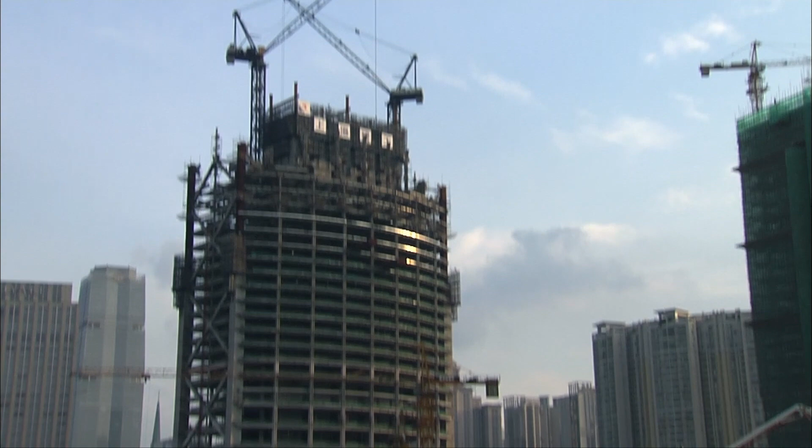In one of the world's most polluted countries rises a 71-story antidote. A tower designed to conserve energy, harness the wind and sun, and generate as much power as it uses. The builders call the Pearl River Tower the world's greenest skyscraper. If they succeed, they'll write the blueprint for the buildings of tomorrow. If they fail, they'll leave a towering mistake.

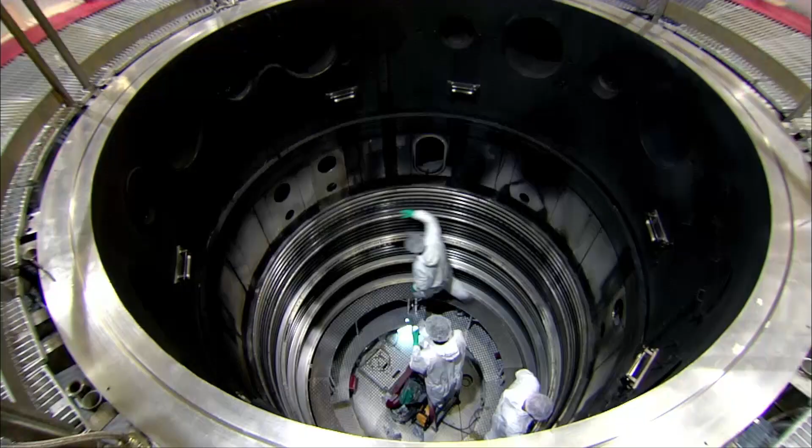Today, as oil reserves dry up, engineers and scientists are inventing other ways to power our cities. Solar, geothermal energy, fusion, wind, and buildings that redefine the skyscraper. A new era of ecological engineering has arrived.

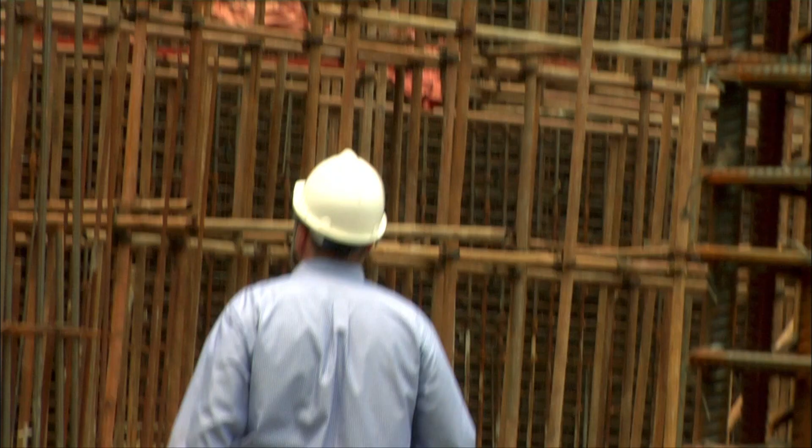40% of the world's energy goes into buildings for lighting, cooking, heating, and air conditioning. Functions that not only gobble energy, but release greenhouse gases.

Architects are billing the Pearl River Tower as a giant antidote. At 71 stories, it will become the second tallest building in the city of Guangzhou, in the southeast of China. The tower is just one of many buildings under construction.

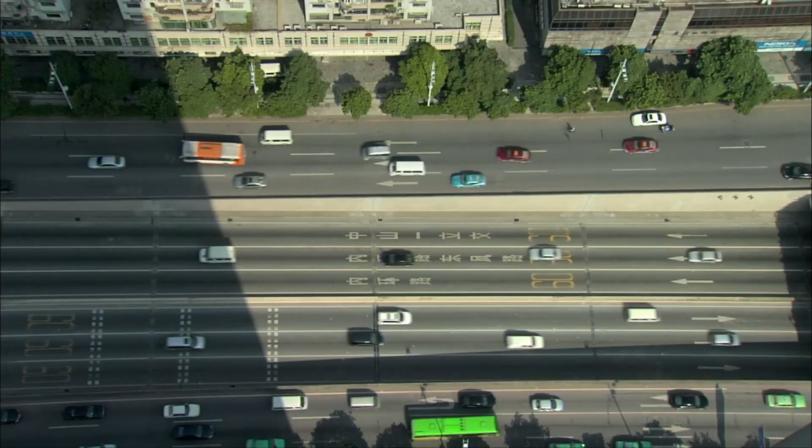A city hungry for development, Guangzhou typifies modern China, a place pressed for time. The Pearl River Tower is part of the future Central Business District. When complete, it will take pride of place in this booming metropolis. For now, this whole area is a huge building site. All the work must be finished by 2010, when Guangzhou will host the Asian Games.

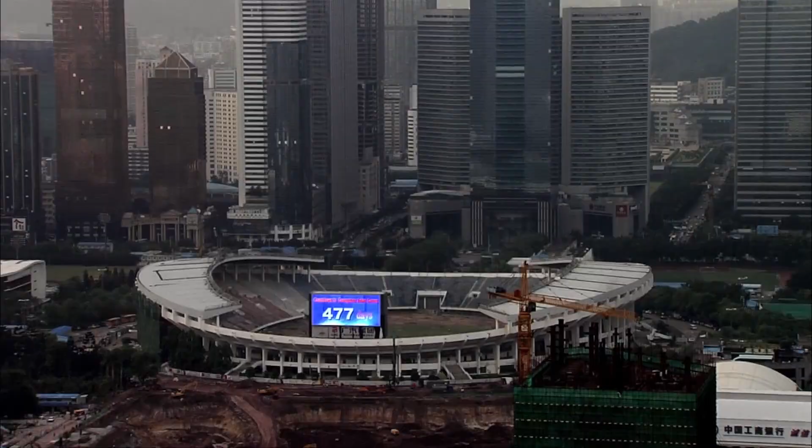China intends the Pearl River Tower as a sign that the world's most polluting nation is starting to clean up its act. To build this ecological high-rise, four players have a key role.

Roger Frechette is the architect in charge. He specializes in clean energy for buildings. If this ambitious project meets its goals, it will be Roger's greatest success. It's also his greatest risk.

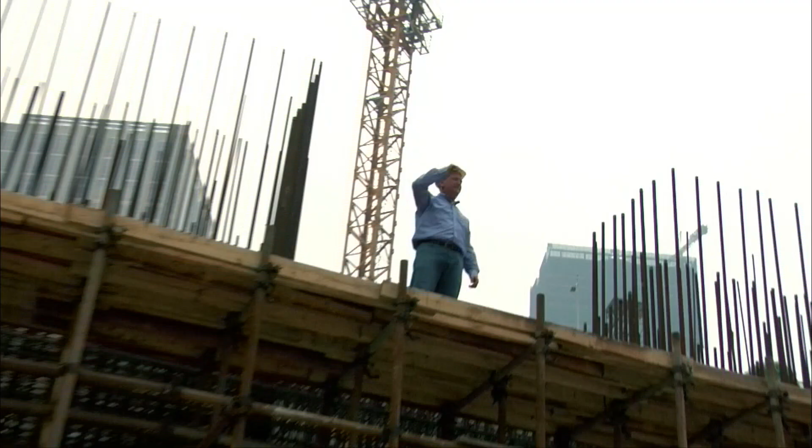It's really a very critical time in the history of the construction industry. The problems that the world sees right now with global warming and shortages of energy are forcing us to rethink how we design buildings and how we build buildings.

Pan Xuan Zhu and Xu Chaoshang work for the Shanghai Construction Company. They're in charge of every stage of the work and hundreds of Chinese workers. Whatever happens, they must stick to the tight construction schedule.

I've been doing this kind of work for 20 years. This is the biggest site I've worked on in my entire career. It's also the boldest. The technology is new and untested.

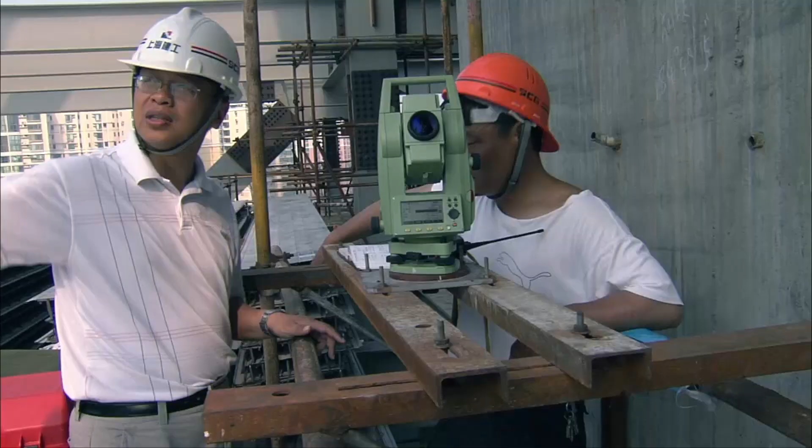It's the first time that I've taken part in the construction of an ecological high-rise. There are a lot of difficulties and technical problems during the construction. For me, it's a huge challenge to manage the whole of the site.

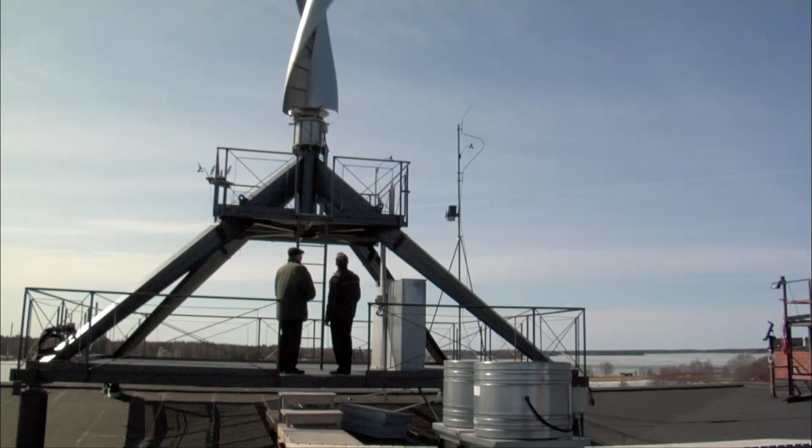And finally, standing by in Finland, Risto Joutsiniemi is far from the building site, but close to the project. He's the brains behind the huge wind turbines that are key to powering the Pearl River Tower. It is my dream to get the earth going without polluting it, only make it really green.

Together, this international team of eco-engineers faces the challenge of a lifetime. The deadline is fixed. Whatever problems arise, they have 2.5 years to transform this hole into the world's most ecological skyscraper.

Roger's firm, Skidmore, Owings and Merrill, knows all about building skyscrapers. In the past 70 years, they've completed more than 10,000 projects in more than 50 countries, but nothing like this. A building that taps the wind and the sun to produce as much energy as it uses. A building that curbs pollution instead of creating it.

Buildings may seem inoffensive, but Roger knows they're a huge source of greenhouse gases. When we think about the problems of global warming and carbon emissions, most people think about cars and buses and transportation and factories. But the reality of it is that there's more carbon emissions that come from office buildings and residential buildings than from those other sectors.

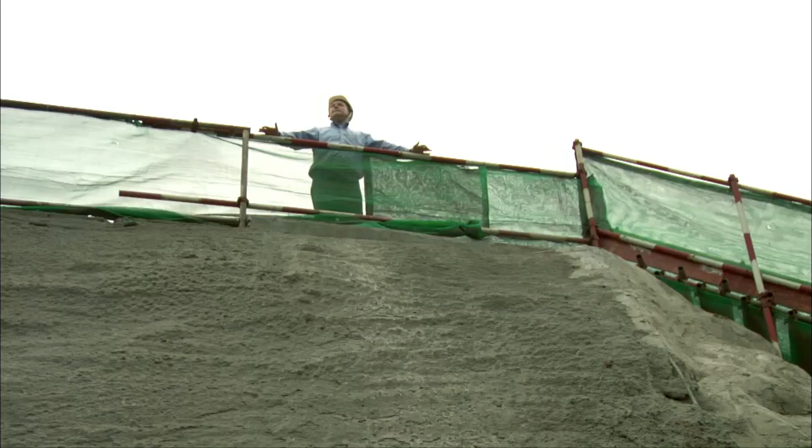Roger is making his first visit to the construction site, where work will hum for the next 2.5 years. On this spot, his dream will come to life. A revolutionary skyscraper, integrated into its environment to tap clean energy.

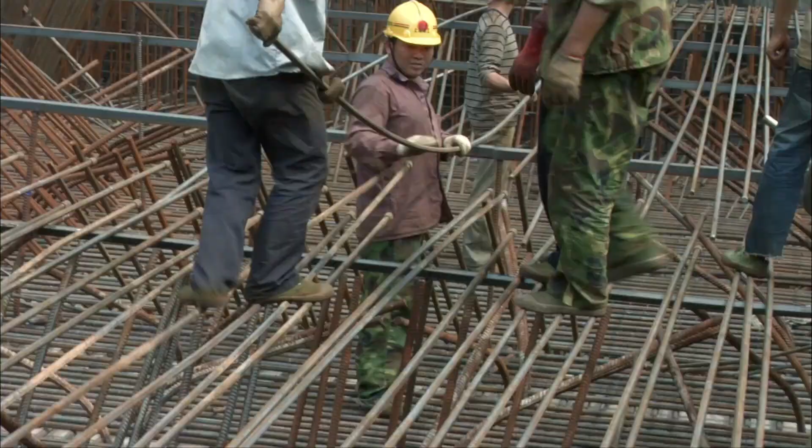Site of the Pearl River Tower. Off to the right here is the hole. Right now, the project is still well below grade. The hole is about 28 meters deep. When the project is complete, it'll rise roughly 309 meters into the air. To put that into perspective, this building off to my right is roughly 100 meters tall, so our project will be roughly 3 times that height.

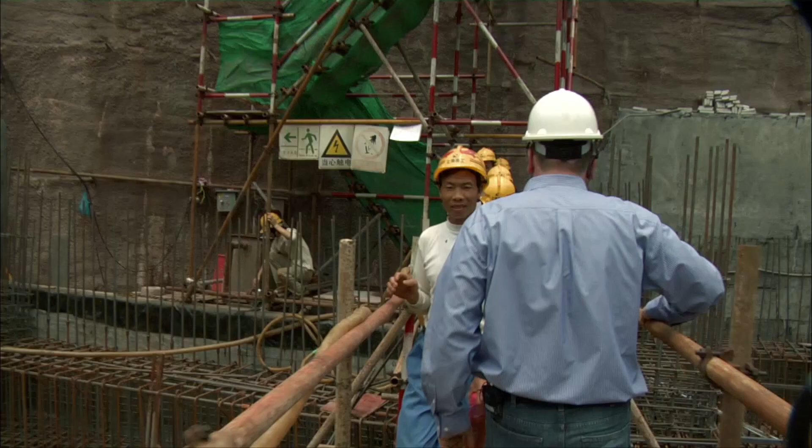Throughout construction, Roger will have to negotiate a slew of challenges: unforeseen setbacks, new techniques, cultural differences, and diplomatic solutions. Above all, looms an unyielding deadline.

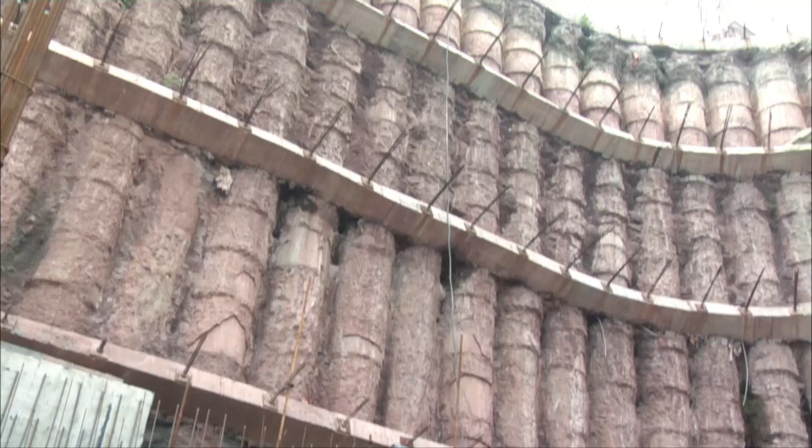The tower also has to guard against unseen forces. China is one of the world's most earthquake-prone countries, and Guangzhou itself lies near a major fault zone. For the tower, protection starts at the bottom. The tower is designed to withstand a quake measuring 6 on the Richter scale, almost as bad as the 1994 quake that rocked Northridge, California.

Erecting the vital foundations is just one of 1,000 burdens for Pan Xuanzhu, the site's foreman. He supervises an army of welders, steelworkers, and crane operators. Pan Xuanzhu is the tower's linchpin, the link between the engineers in their offices and the teams on site.

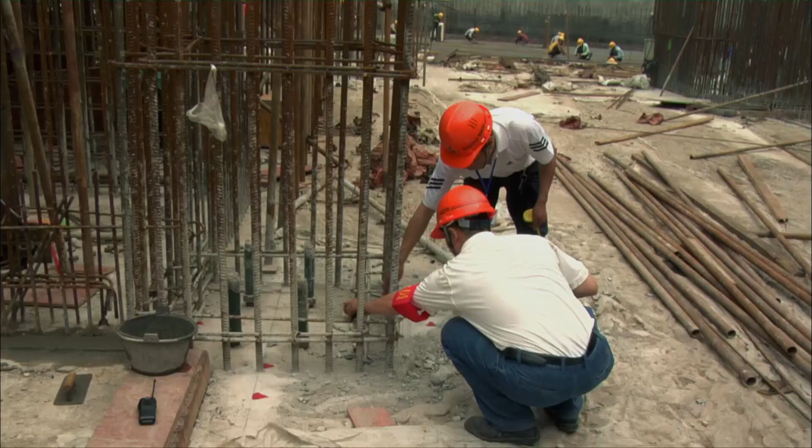My work goes like this: first of all, I have to establish plans for how to execute the job. Then I pass these plans on to the workers. Every day at midday, I go down to the site to look over the work myself and see if everything's been done the way it's supposed to. We have 500 workers on the construction site right now. Their tasks are well defined. A professional team installs the cranes, and then there's a second team working on constructing the beams and putting the steel framework in place.

Pan Xuanzhu makes sure the engineers' plans are followed to the letter. In this 3D jigsaw puzzle, one slight deviation could cost millions to fix.

This metal forest will safeguard the foundations against quakes. The ground may shake, but the tower won't budge. It's a labor-intensive part of the building process.

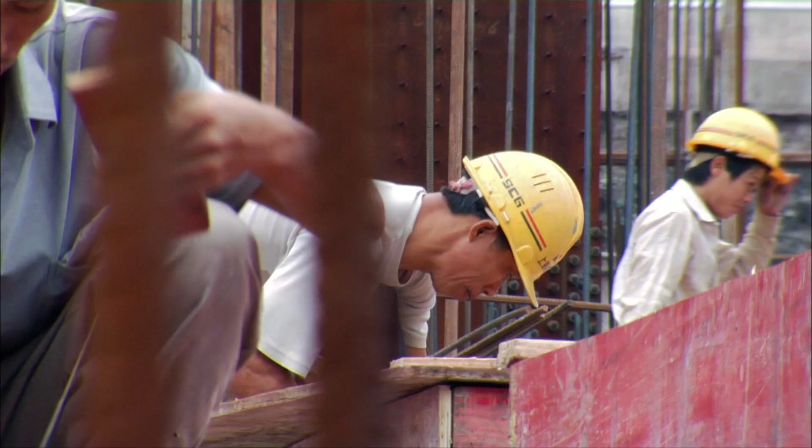Because the tower site is so complex, Roger Frechette visits regularly to brief the managers. He also checks the coordination between the specialty workers and makes sure work is advancing as planned.

But there's a hiccup, and Roger needs to meet with the local team to fix it. Some of the Chinese engineers are questioning the revolutionary ventilation system. They're wary of the new technology.

It's a classic situation for Roger. He wages a constant battle to change habits in the world of construction, and language complicates every problem.

I think this is really important. I think that this is something that we really need to focus on, and I think time is short. Now, one of the real benefits of having a double wall is that we have the ability to isolate that hot air, that energy, and to pull it out of the building.

While Roger and his team aspire to revolutionize power consumption, the local engineers prefer their tried and tested methods. But I wanted to make you aware of our concern and why we are concerned about pulling this hot air through the chilled beam. To win them over, Roger must be diplomatic, but firm.

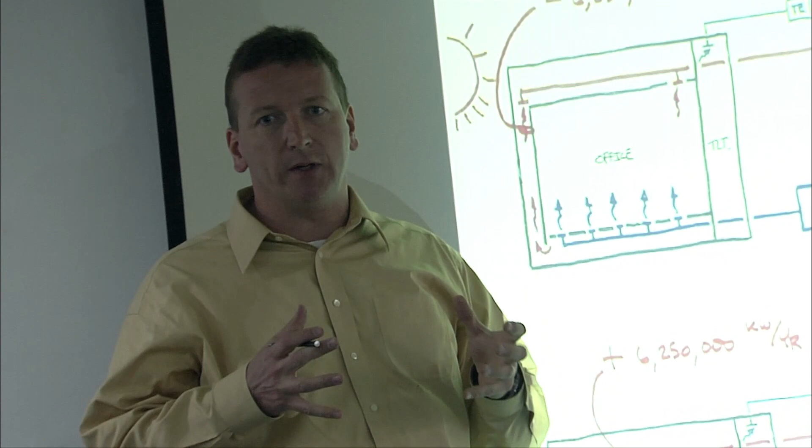A certain quantity of air has to be rejected. He can't yield if he wants to realize his dream, a building that generates all the energy it needs. No single solution exists. He requires a cocktail of skillful technology and ingenious design.

First, the very position of the tower is key to tapping two large sources of energy: the sun and the wind. The tower walls facing the sun are covered in photovoltaic cells, and the tower's aerodynamic shape attracts and accelerates the wind toward its four huge turbines.

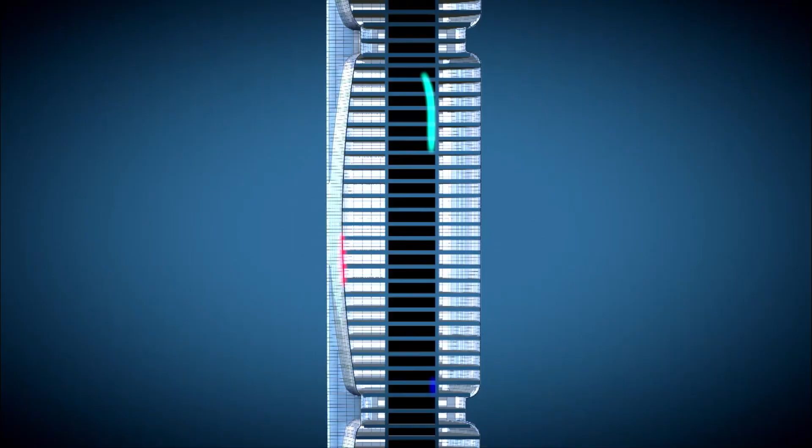Unlike most buildings, the tower will let in a flood of light to conserve electricity. At the same time, a protective layer on the facade will capture excess heat from the sun to keep the interior cool, without relying on energy-guzzling air conditioning. It's this combination of technologies that makes the Pearl River Tower the first of its kind.

Roger returns to his office in Chicago and hopes that the local team has fully understood what he has told them.

The engineers' qualms have caused delays. The deadline is a mere 18 months away. Although the core of the tower has passed ground level, the basement floors still aren't finished.

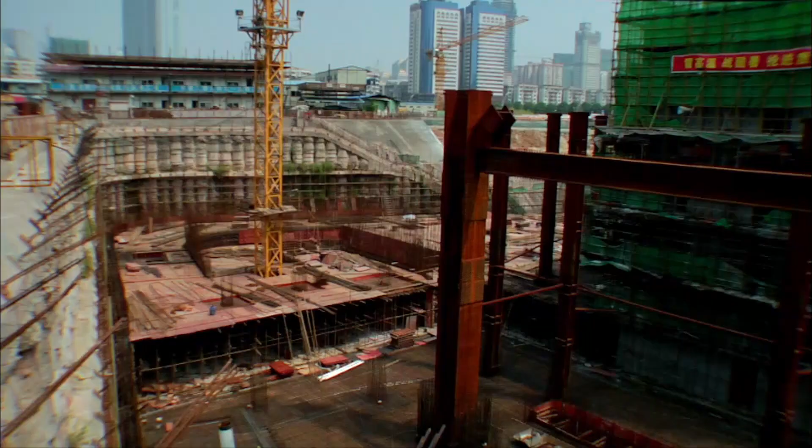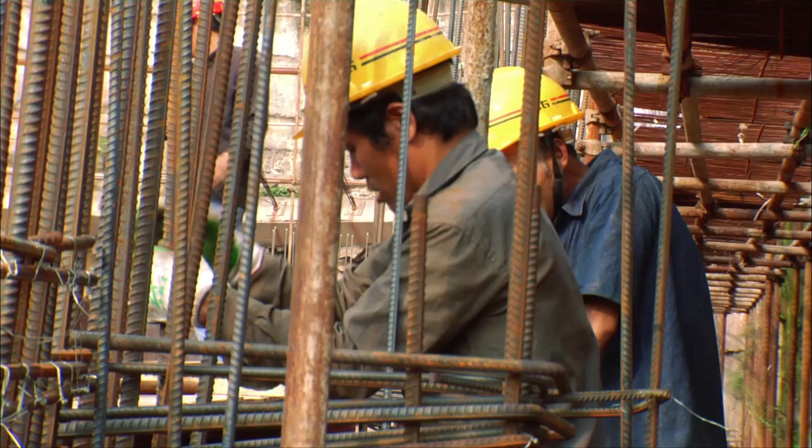The site is as busy as an anthill. Workers measure thousands of planks, which will form a temporary mold for each of the concrete floors. Steelworkers will then construct the metal structure to support the reinforced concrete. A whole floor takes shape, and the process will be repeated 71 times until the tower is complete.

With an unyielding deadline, the management has to find a way to make up for lost time. Simple: work into the night while the rest of the city unwinds.

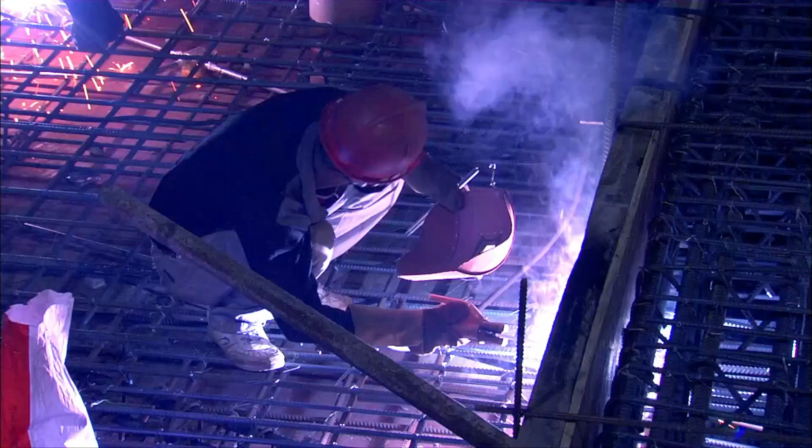Xu Chaosheng is brought in to get the work back on track. The weight of the skyscraper now rests on his shoulders. It's also a chance to shine by pioneering time-saving techniques. He puts his ideas to the test at once.

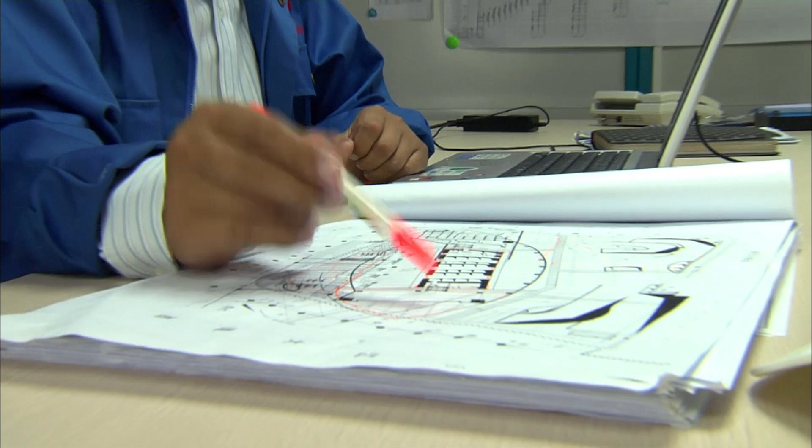Today, we're mostly working on pouring the concrete in the East Zone. It takes about 30 workers. By this evening, we will have poured 1,000 cubic meters of concrete. In the other zones, we're building the metal structure so we can be ready for the concrete there.

Xu decides to pour concrete for one vast area rather than pouring it in smaller sections. If it works, he'll save precious time. Xu's move is bold. It allows no room for error.

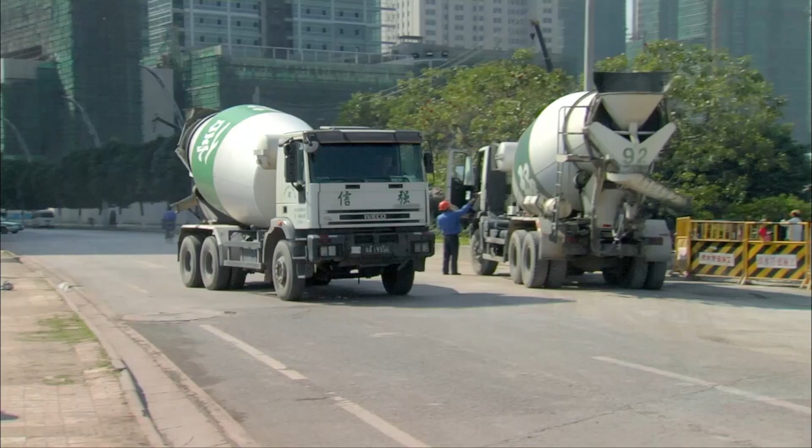The vast operation begins. More than 1,000 cubic meters of concrete are about to be poured, the equivalent of 50 cement mixer trucks. Weeks of sweat will be tested in just minutes.

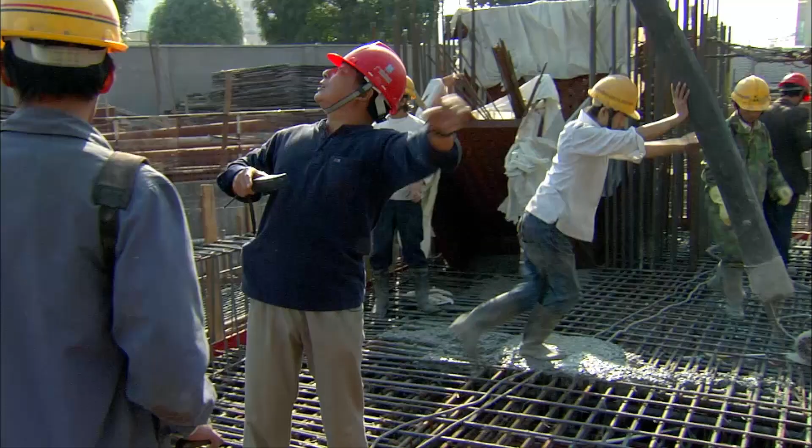Everyone's gearing up. Tension mounts between the bosses and the workers. It takes a huge amount of coordination to organize the arrival of the mixers, pinpoint where to pour the concrete, and spread it properly. The construction supervisors are under pressure.

The process requires teams of laborers, intense concentration, brute strength, close supervision, and long hours without a break. As each load is pumped in, the floor begins to take shape.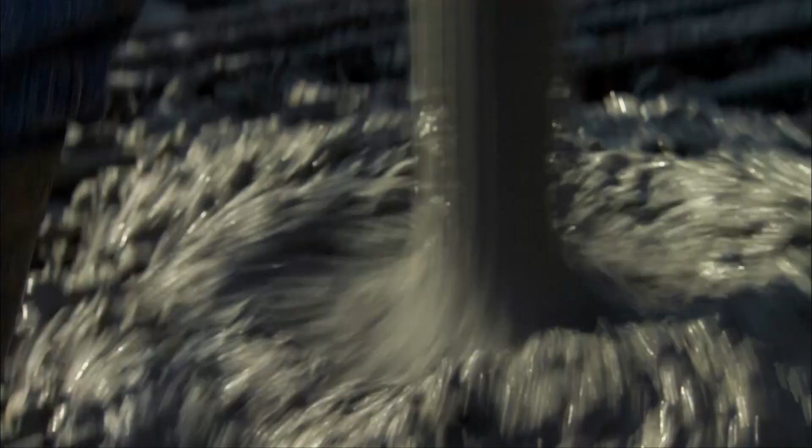If the structure is poorly made, the concrete will pour into the wrong place. Then all work must stop while they make urgent repairs, with a slew of repercussions. Workers placed on standby, cement mixers sent back, and a chain reaction of delays across the site. If parts of the steel structure are missing, a weak point will be created that won't be detected once it's covered in concrete.

By the end of the day, success.

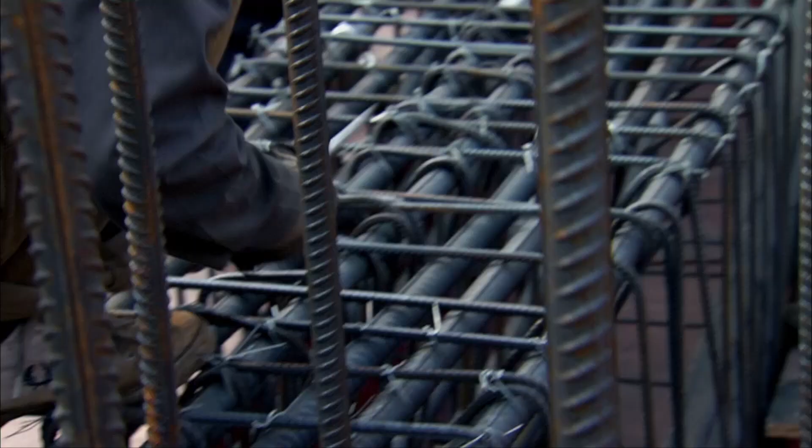At the other side of the site, teams of steelworkers continue non-stop. In less than a week, it will be their turn to have concrete poured. In all, it will take more than 3,000 cement mixer loads to build the tower's foundations.

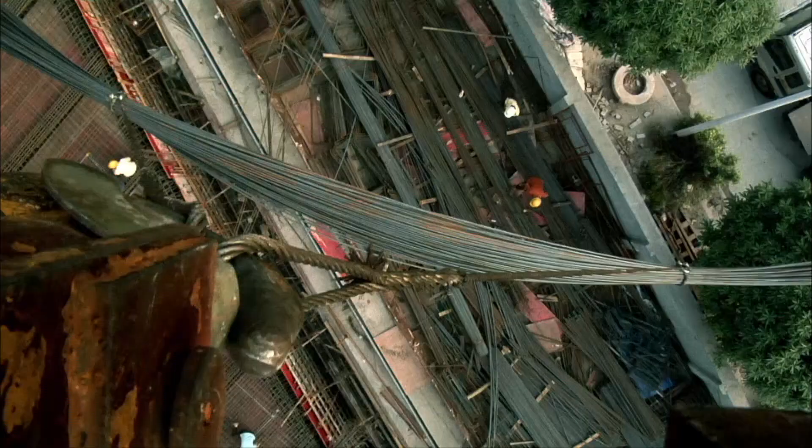The site managers check all the team's work and study the engineers' plans in detail before giving the orders for the day. Tons of steel rods are received and positioned according to the blueprints. At every step, surveyors watch for the slightest deviation from the plans. The tower is rising above ground, but work continues in the foundations down in the bowels of the building.

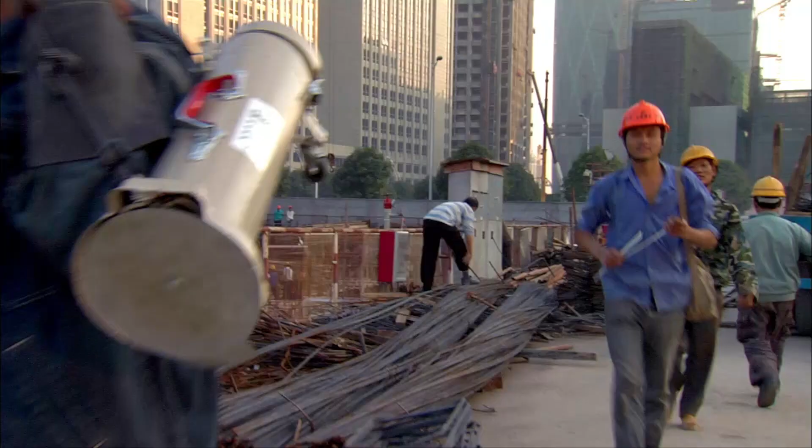Not all challenges on the site take the form of concrete and steel. Some are flesh and blood. Xu has had to recruit more workers to stay on schedule.

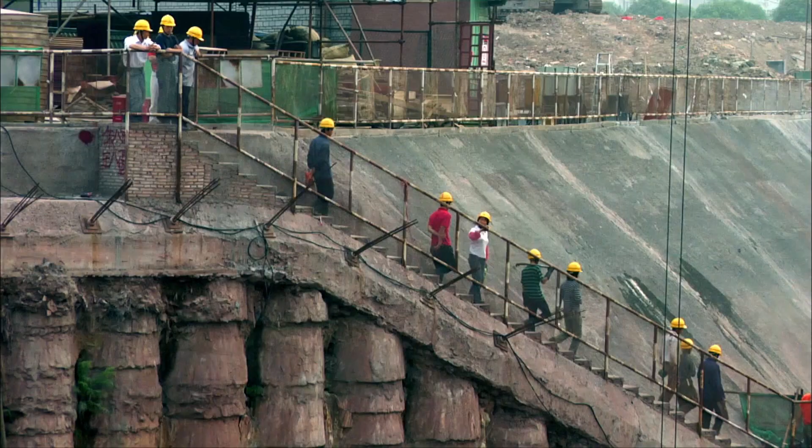The workforce hails from all over China. Most come from Shanghai, a city over 700 miles away. Others left homes even farther away. Their lives now revolve around the building site. Co-workers have become family. The site has become home.

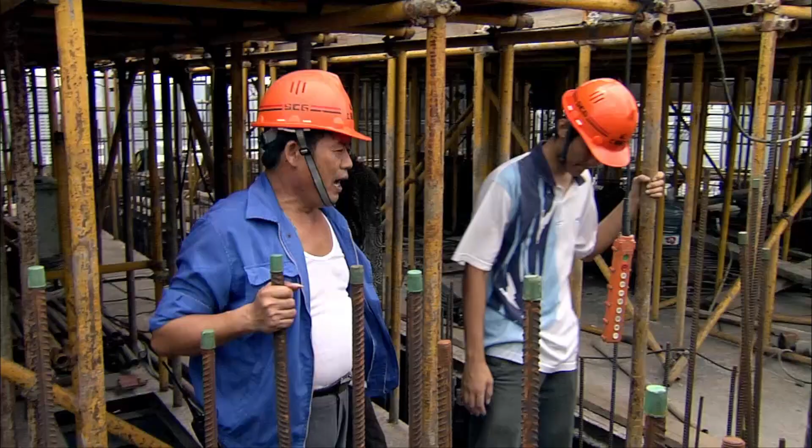In a vast country like this, there's no common language. China speaks more than 100 dialects. Dozens are spoken here alone. Mandarin, one of China's 7 major languages, is used to communicate key information. No time for misunderstandings here.

Clarity counts, and for the clearest vision of the site itself, you need another perspective. A view from the tallest building in Guangzhou, the TV tower.

From this height, Roger can show how location will shape the ability to generate power. It's very important in the design of the Pearl River Tower that we take into consideration the context, the physical context and the environmental context.

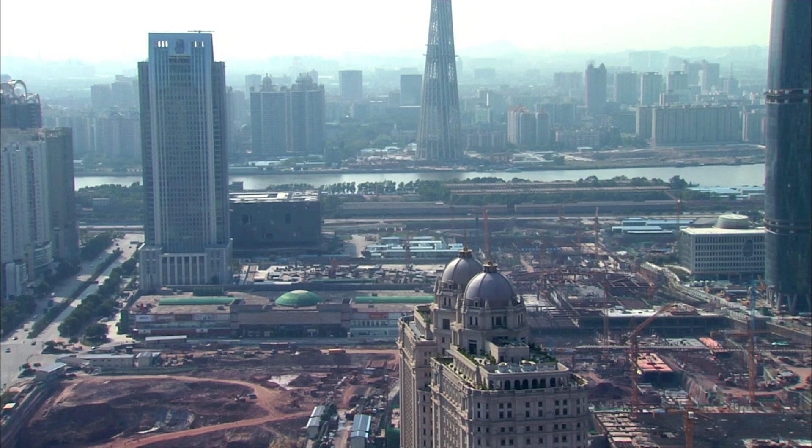The Pearl River Tower is going to be built along a central axis for the new central business district in the Newtown area of Guangzhou. The building will be located on the northwest corner, and in this location, the building will have uninterrupted access to sunshine through most of the day.

As the sun rotates through the sky, we have this great park that will sit in front of the building that will not block the sunshine that will come in contact with it. By carefully angling the skyscraper, the architects will fully exploit solar energy.

The sun's rays are strongest on the south and east. Photovoltaic cells will be integrated into the building's external shading system to provide electricity, but also to protect workers from excess solar radiation. But the other thing that happens is the prevailing winds in Guangzhou for most of the year are coming from the south.

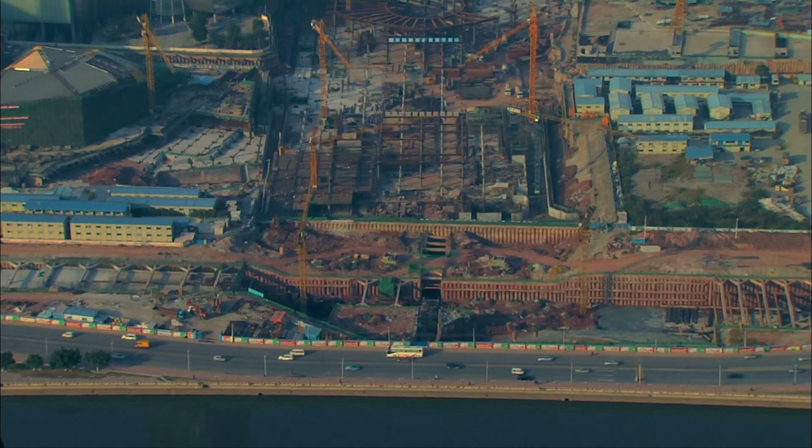And as these winds pass through this new central business district, there will be no other buildings blocking this wind before they come in contact with the Pearl River Tower. So the winds will hit the turbines and they will be the first thing that the wind sees. But between absorption of wind and absorption of sunlight, these energy streams will be turned into power, and this power will be what helps to drive the building.

But at the site, the building is far from finished. Xu is installing a new crane to speed things up.

Yesterday, we finished installing this large blue crane, which is 54 meters tall. It will be used for lifting big girders like this one. It can lift a maximum of 64 tons. That's enough for all our needs.

It's special because it can rise up as the tower rises. In other words, its height of 54 meters doesn't change, but it can rise with the tower.

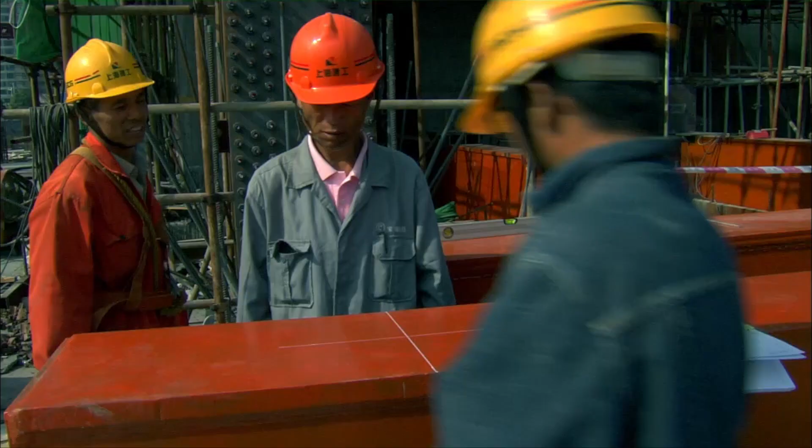Now we're going to test it by having it lift this 20-ton girder. This test is supervised by a team from the government in order to validate it. If the test fails, the time can't be replaced. But Xu might be. After we've lifted the girder, we'll do a multi-directional test of the crane.

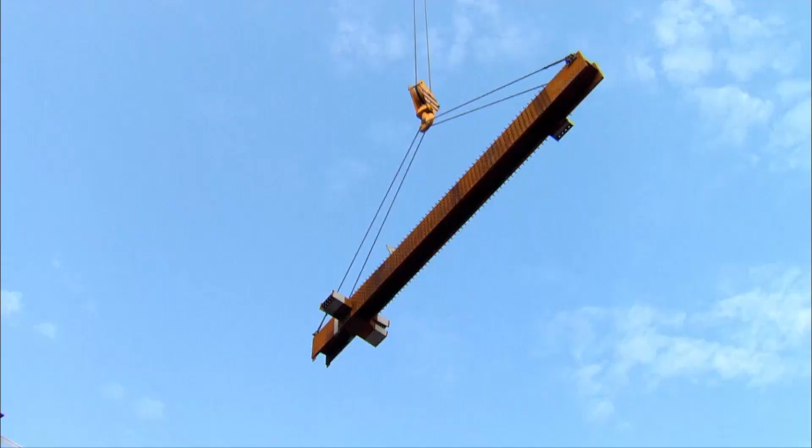After that test, we can be completely confident about this crane. We'll know it can finish all the work we need it to do. Everyone's on standby till the results come in. The crane passes with flying colors. Now it can start hefting all their loads and make construction fly.

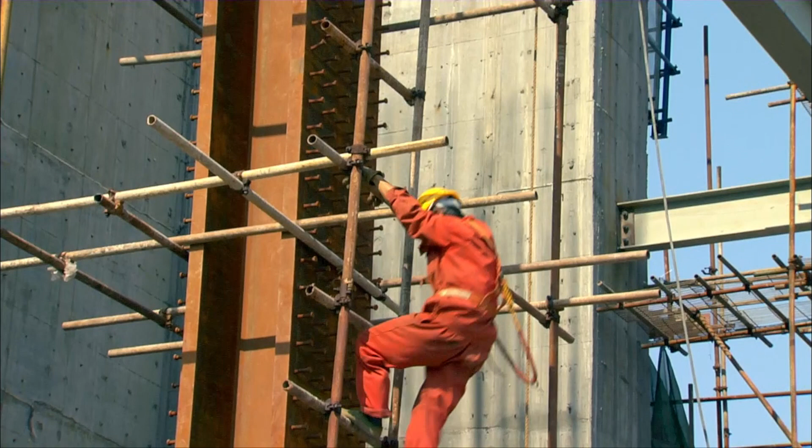Within weeks, the core of the tower reaches 40 meters, 120 feet. To work at these heights takes the construction equivalent of trapeze artists. They're called steeplejacks. They'll erect the steel frame that surrounds the core and supports the extremities of the higher floors. Their best friend? The safety rope.

Although the steeplejacks are all qualified climbers, the work is risky. These guys require a combination of daring and caution. A tool dropped from these heights could kill.

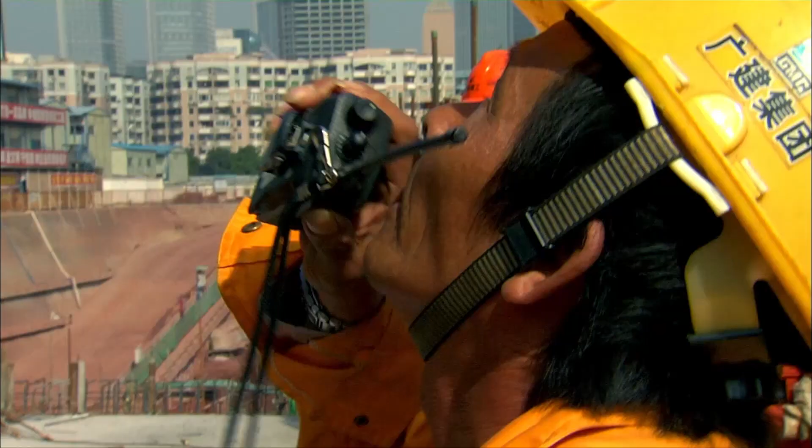To maintain the tower's balance, steel girders weighing more than 10 tons must be precisely positioned. Since the crane operator can't see so far, the steeplejacks talk each girder into place. They'll bolt, weld, and if necessary, adjust the girders. No room for vertigo here.

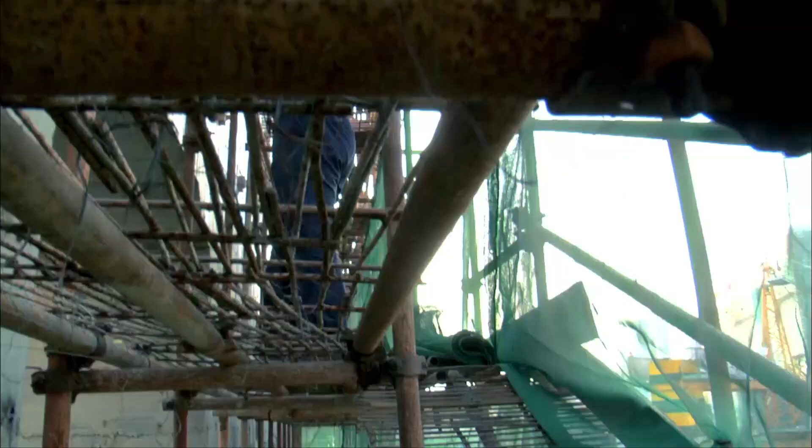Steeplejacks, steelworkers, concrete. Work has been going full steam for a year now. Next comes a huge step. This is a critical point in the work on the core. We're about to install our self-climbing scaffolding system. Using this system, we'll be able to take away the scaffolding. The support sockets are already installed here, where the self-climbing system will be attached, and it's almost all assembled at the bottom. This system is the only one of its kind in China.

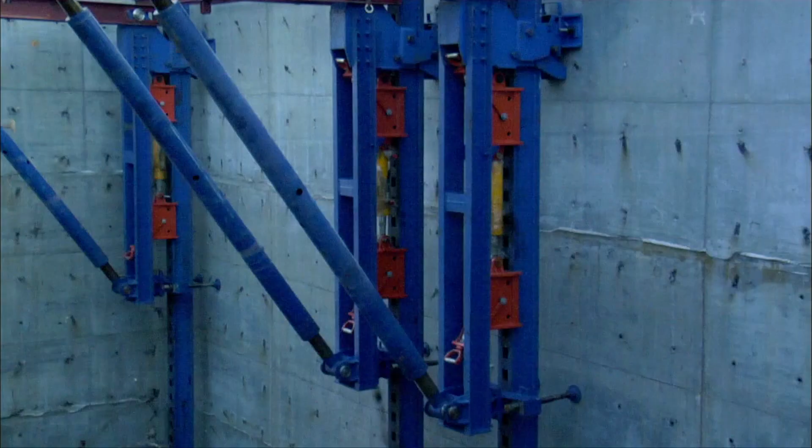Along with the crane, Xu hopes it will help keep construction on schedule. After all that, we'll be able to do all our work on the core using this automatic system, which is controlled by computers. So from that point, we'll be much more efficient. We'll go from taking 12 days for each floor to 4 or 5 days. And at that speed, we'll be able to build the core to a height of 300 meters in 8 months as planned.

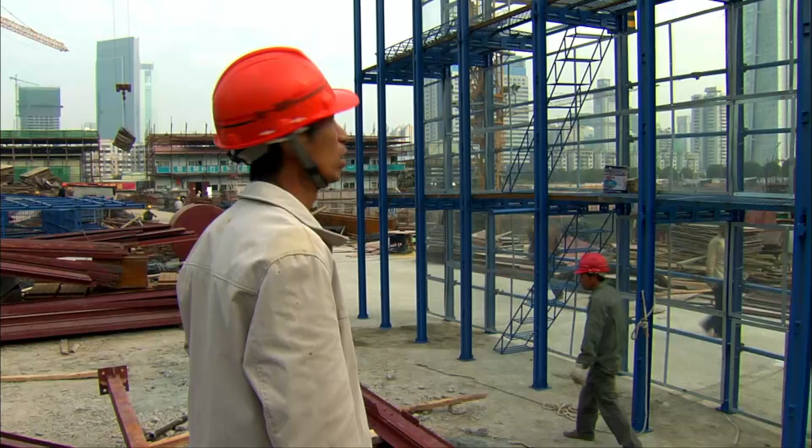In a nation of 1 billion people, Sheng Xingwan is unique. He's a specialist in this kind of system. So these are the support frames for up there. We'll fix them in place by bolting them. We can also suspend a platform inside the core where the workers can work and advance on the building of the tower.

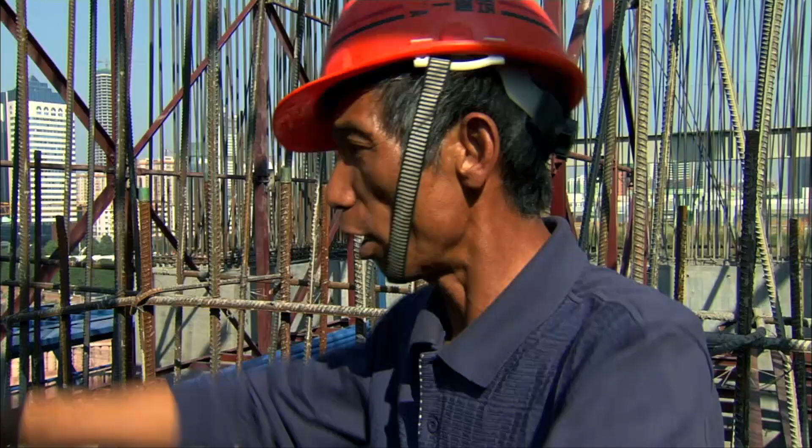What we're making is a kind of interior scaffold that can change shape depending on the structure of the building. When we pour the concrete for this wall, the shoring will rise automatically in accordance with the building, using the hydraulic jack system. For example, if the floor is 3.5 meters high, the platform can rise up 3.5 meters to start work on the next floor to be constructed. So the workers can then start working on the steel frame and place the shoring before pouring the concrete, and so on and so forth.

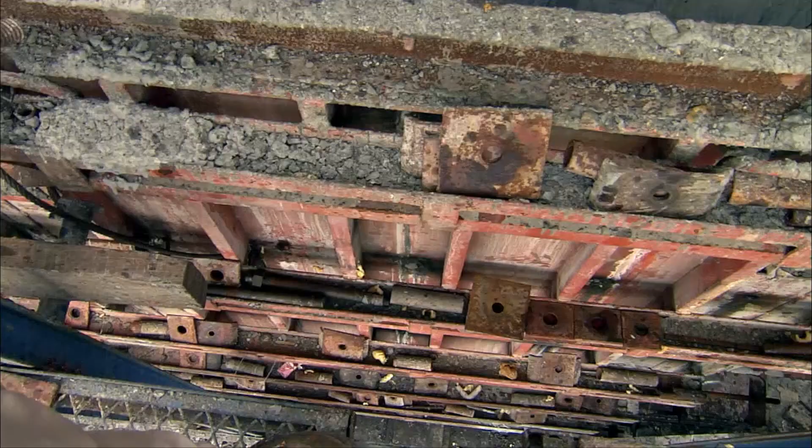We'll climb like that up to 300 meters. That's the process.

It's a big day for Sheng. He has to coordinate the installation of all the platforms inside the central core and the blue structures on the outside, so crews can work safely without scaffolding. If all goes well, the backbone of the Pearl River Tower will start to take shape at 1 meter a day.

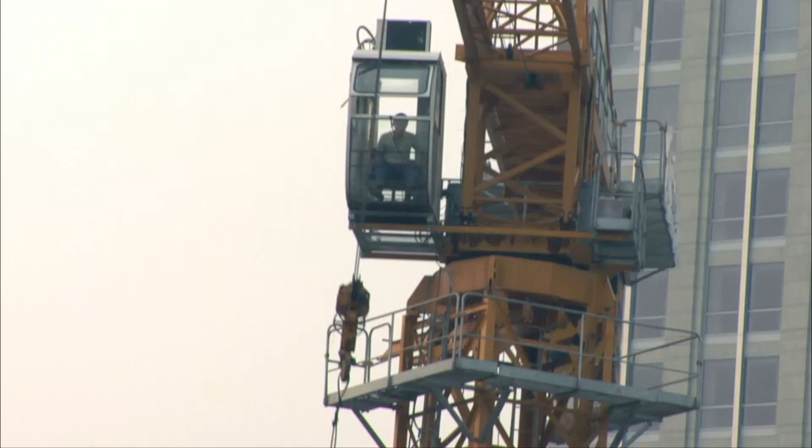This Leviathan can manipulate these mammoth components with the precision of a surgeon's scalpel. Sheng guides each section into place by keeping in constant contact with the crane operator. At the same time, teams are assembling the platforms so work can continue as soon as the self-climbing scaffolding is in place.

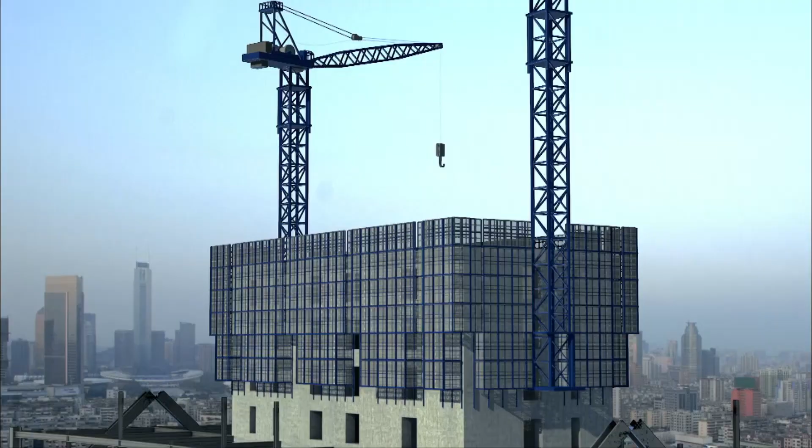With his innovative ideas, Xu has recouped lost time. Construction moves at full speed. Now the tower can be seen from a distance, standing 100 meters tall, almost a third of its eventual height. Girder by girder, the skeleton takes shape. As the framework rises, the floors follow close behind.

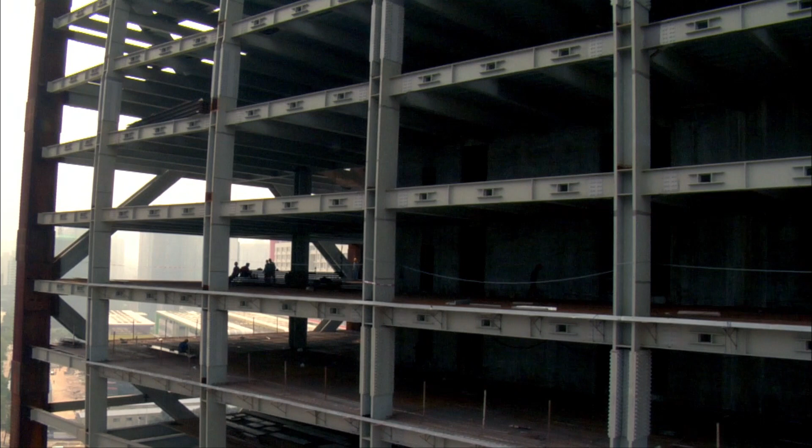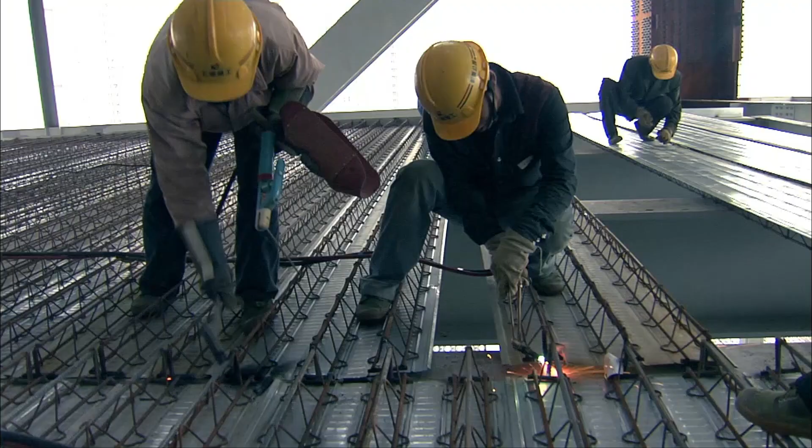For a floor of this type, we need a dozen or so workers who work for 3 days to install it. After that, we'll need a day for the metal frame, a day for the concrete, and with all the work together, we'll need almost 4 days extra. After that, the floor is finished.

The progress impresses a visitor, architect Roger Frechette. Barely a year has passed since he first came to the site. It's gone from a hole in the ground to a vision in the sky, the green workspace of tomorrow.

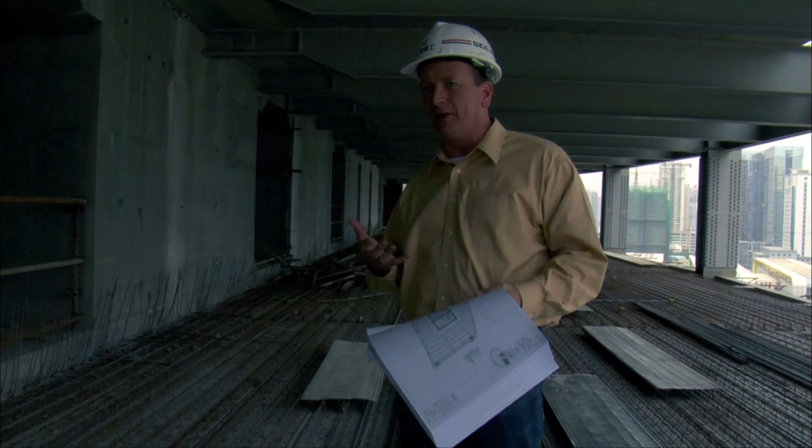This is what will be a typical office floor within the building. And if you can imagine, about 1 year from today, what you'll see is a couple things. One, you'll see a floor system, and the breathing air for the building will come up from underneath your feet. It'll come from the floor, and it'll rise up with natural buoyancy of air through the breathing zone, and that's how people will get their fresh air for the building.

What you'll see at the ceiling is there'll be a number of concave metal panels, and those panels will be cooled down, and at their cooler temperature there'll be a radiation exchange that happens between the panels and the people within the space, and this is what's going to make them feel comfortable.

When we go over to the perimeter of the building, what you'll see is there'll be what is known as an internally ventilated double wall facade. As the sun comes in contact with the skin, it heats up hot air within the layers of glass of this exterior wall. That hot air is then drawn up through the building, and we can use that hot air for other purposes. So air from the space will travel low into the exterior wall and will rise up between the layers of glass in the space.

And it is that air movement in the glass that causes a cooling of the glass and will help to maintain thermal comfort in the space. Now, hot air that is collected in that glass will be brought back to a technical floor, and we'll be able to reuse that energy elsewhere in the building.

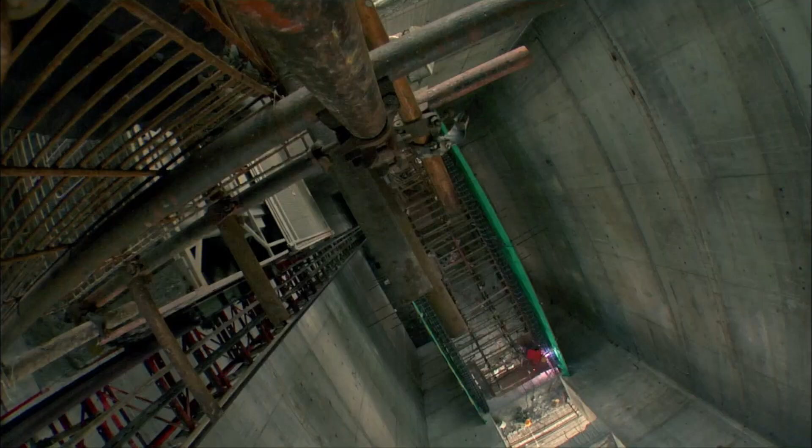Roger heads to the rooftop to review the work with Xu Chaosheng. For the moment, we've built up to the 22nd floor. That's where the wind turbine will be placed.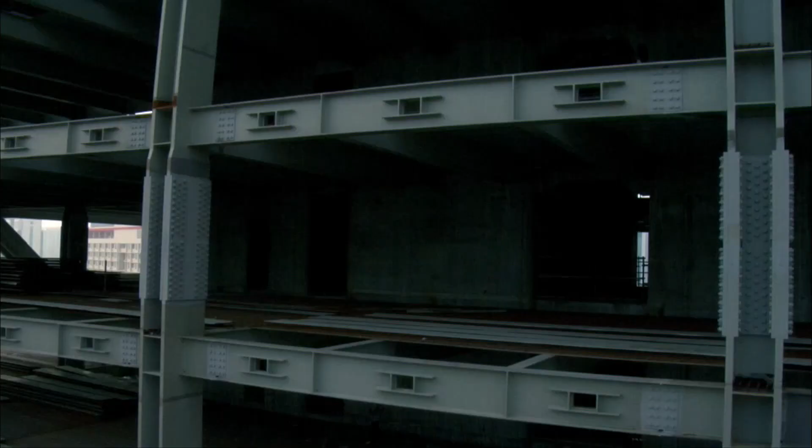A few days before, we were here, and the construction of each floor took about 12 days. However, we're getting faster and faster. Having built 10 floors, we can now build a floor in 3 days. So we're very confident about finishing the work at the end of the year.

Where we are right now, the first mechanical level starts about 1 floor above us. And it's at that mechanical level that we'll have the wind turbines.

You know, it's quite nice. When we were down on the ground, you couldn't feel any wind at all. But now you're up here, there's a nice breeze. You know, so I'm very excited. I think when these turbines are in place, they'll really do a good job. They'll be able to generate a lot of power.

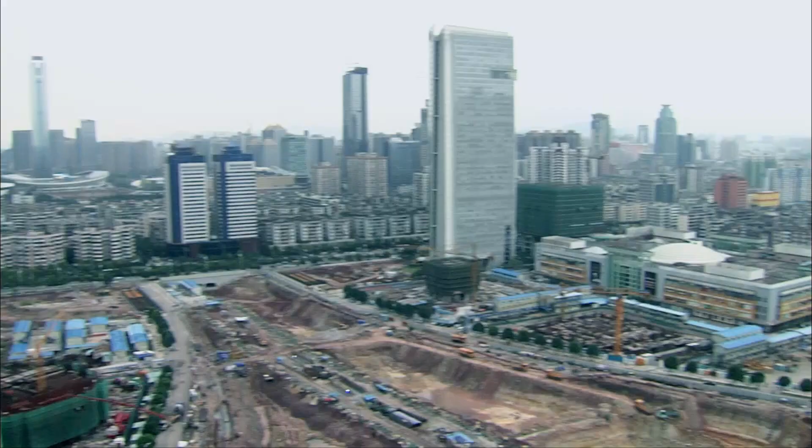But how do you insert a wind turbine, a notorious source of vibration and noise, inside an office building? Roger and his team had to go to Finland to find the solution.

In this Scandinavian country, where the sun appears for only half the year, inhabitants have tapped an alternative source of clean energy. As well as classic turbines, you find designs adapted to city life. No noise, not even vibrations. A jewel from the north, brought to the Pearl River Tower.

The man who pioneered vertical turbines in Finland is Risto Joutsiniemi. Risto's company, Windside, has the longest track record for making urban turbines. So the designers of the Pearl River Tower chose him to help build a new concept into the world of architecture and give their skyscraper a green advantage.

This building is like a sail, so it means that it is very high wind pressure. Other buildings you build so that they are taking care of the wind, otherwise to try to get the wind away from the house. Here you are collecting it. We have here south, and here on the other side we have the north, and the prevailing wind, the main wind, comes from the south.

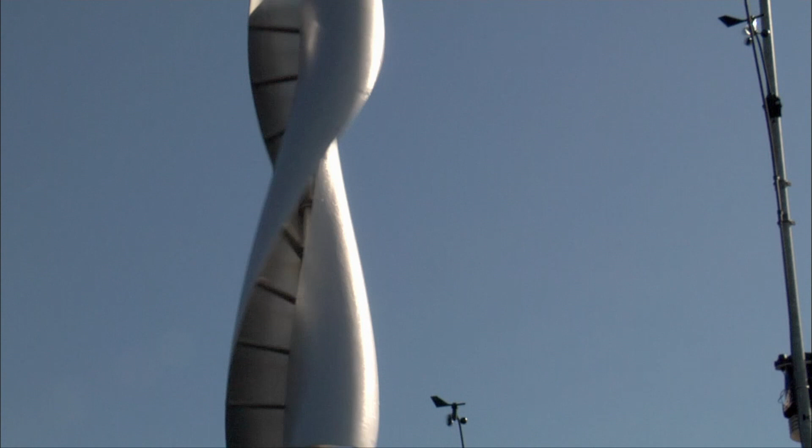Here it is, what I want to show you. This is a special windmill, approximately 1 meter wide and 4 meters high. This is the only windmill you can put in urban circumstances. It is totally soundless. This is a very special model, and you can put it wherever you want, even in the middle of town. If you have a propeller, you cannot put it on the roof of a house because there's a lot of noise. There is 0 decibels. We are so near and you cannot hear anything. This is our specialty.

You can touch your bare hands to our turbine, and this is not dangerous at all. This is the only turbine I know that you can touch even when it's moving at full speed, and nothing dangerous happens. So it doesn't kill birds or anybody else. You see there is rather good speed already, with maybe only 3 meters per second wind, and it doesn't go faster than this. This is why it's so safe. It's always going this slow rotation, and only the torque comes bigger and bigger, and this is just perfect for the Pearl River Tower.

The University of Vaasa is known for its research into electronics. Risto has made this his test lab. With his colleagues, he's working on a system to monitor his turbines remotely.

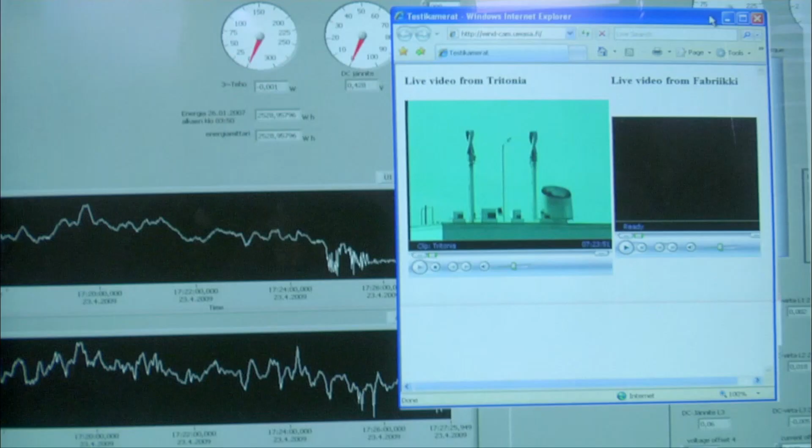He can check wind speed, wind direction, and power output, and use a webcam to spot problems. Risto needs all this data to keep improving the system he created and to replicate this model at the Pearl River Tower.

This is what we try to do in China. We have 4 turbines and 4 monitors, and we can look from here what happens and what is the production in China. I think this can be a very beautiful cooperation with the university in the future.

At the building site, the floor that houses the turbines is about to be constructed. Here, the facade narrows down to the floor where the turbines will be installed. At this height, architects have calculated the wind should accelerate by up to 250% before reaching the tunnel where the turbines are housed.

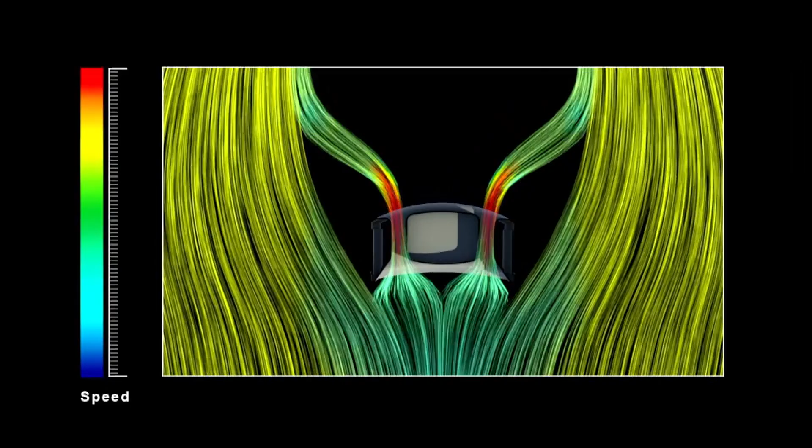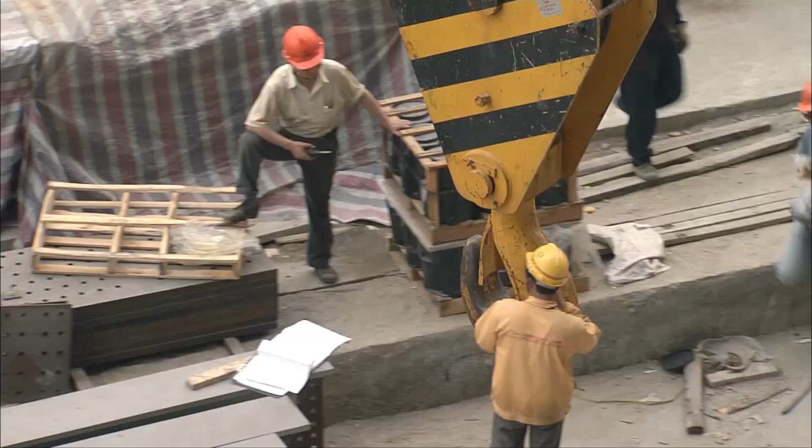The curve is created using custom-shaped girders, perfect for the turbines, but a nightmare for the construction teams. They must be positioned with absolute precision, and fixed securely once they're in place, under Shu's eagle eye.

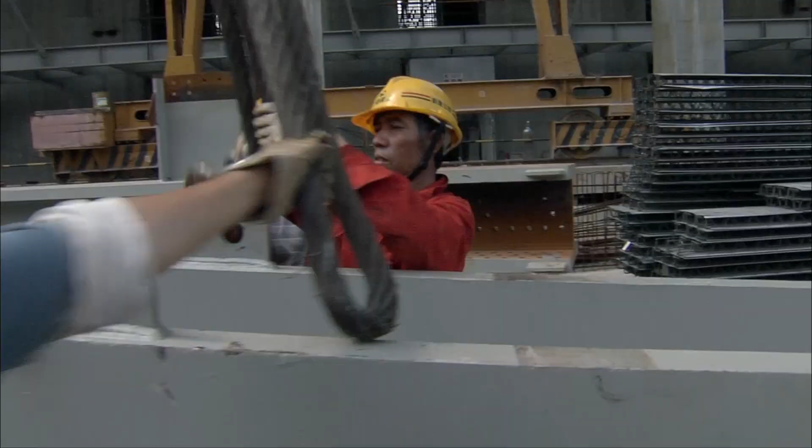The last big girder for the turbine floor arrives. As with the others, just getting it off the ground is a headache. This metal girder weighs about 21 tons. Its special, non-rectilinear shape gives us real problems for lifting. We really need to pay attention, because it's very difficult to find its balancing point and work out its center of gravity in order to lift it properly. It's a dicey operation.

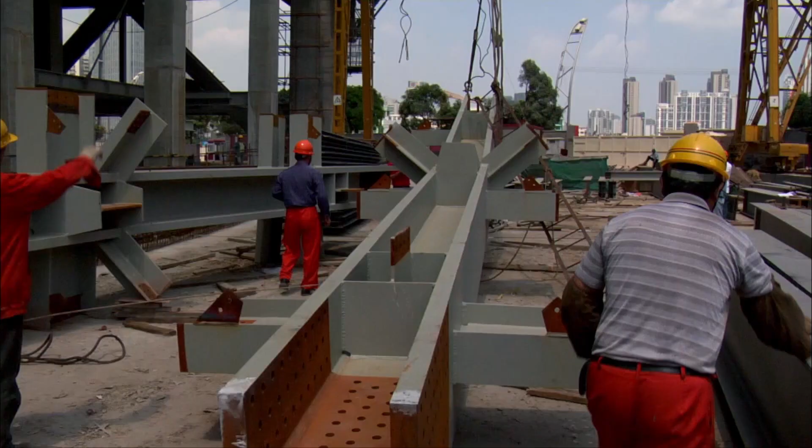In cutting-edge construction like this, each step has its complications. Almost the entire 19th floor has been built. All the girders are bolted and welded together. Total weight: 400 tons, equal to one jumbo jet full of passengers. Everything must be checked once and for all to detect any problems that could upset the schedule for the other floors.

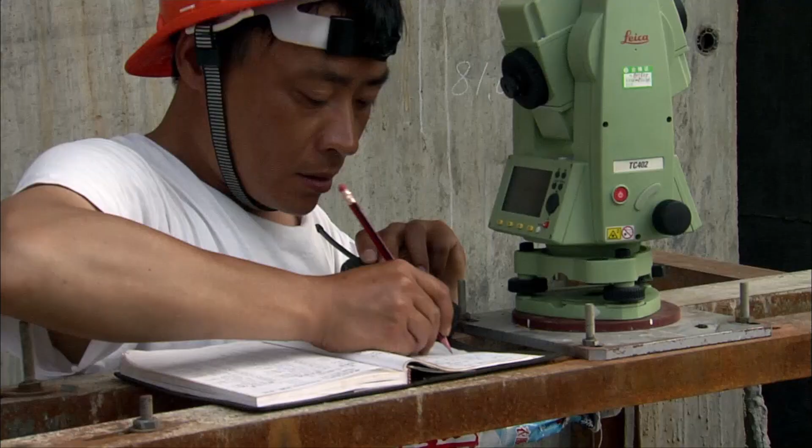Now we are lifting the girders for the construction of the 19th and 20th floors.

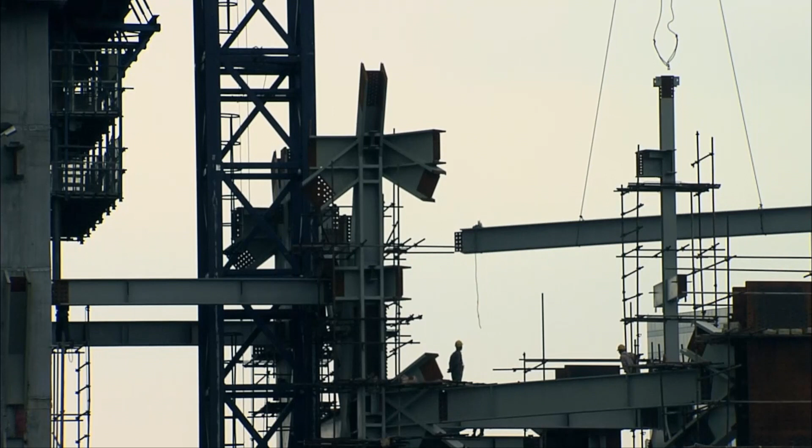For everyone, reaching the turbine floor is symbolic, a milestone not just for the tower, but the nation. Engineers, foremen, workers—everyone is working full out so the Pearl River Tower is completed before the Asian Games in Guangzhou. Whether they finish on time, they hope to meet a far bigger goal: planting China's first seed of clean energy.

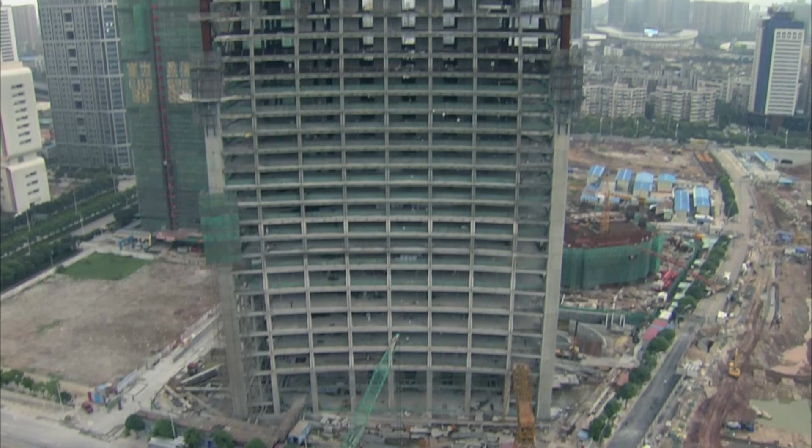This tower is the first real ecological building in China. It's the first time a skyscraper has brought together 11 ecological technologies that allow us to reduce our energy consumption. So the ecological skyscraper is exactly what the Chinese government is aiming for. In fact, at the moment, the current government wants to move more and more towards new technology and clean energy.

I'm very proud of this ecological building project. Nowadays, everyone in the world is worried about protecting the environment, and I think the ideas behind this project and this building are excellent. I also hope this kind of ecological building will be used as a model for other buildings.

The Pearl River Tower, I think, represents a big step forward in the science of sustainable buildings, and we're hoping that it's something others will study, learn from, and then carry forward. Even unfinished, the Pearl River Tower marks a new era in architecture, when concrete, steel, and glass will all share the same color: green.